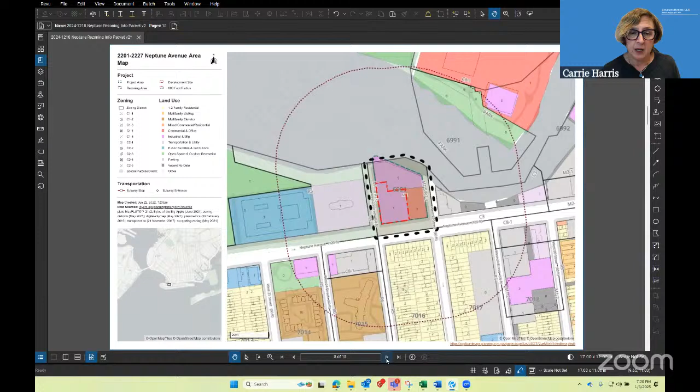There's multifamily in the tan. There's a public garden in purple opposite the site, and a public school in blue, the Mark Twain School. Some of the other uses in the area include manufacturing or heavy commercial uses, such as the building on lot 20.

Our proposal is to rezone the M1-2 block, which is where we are, into a mixed use zoning that will allow the manufacturing use to stay not just as a grandfathered use, but as an active zoning compliant use. It could even enlarge, while at the same time enabling our client's property to be used for a mixed use commercial and residential building, while allowing the Win building to remain as its current use for the shelter.

It's not a shelter that people just come in and out of. Well, they do come in and out, but it's for people who are escaping domestic violence in particular, because that's the Win program.

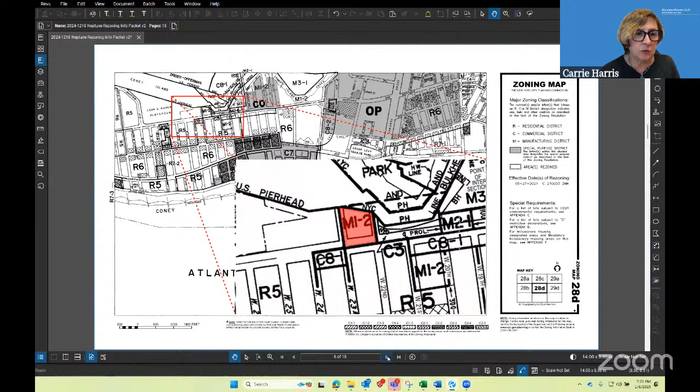So our proposal is to rezone this block to an M1-5/R73 district, which would allow for a maximum of 6 FAR residential, as well as manufacturing use and commercial use. There'll be a text amendment to add a mandatory inclusionary housing district, and there's a waterfront certification. Even though this block is on the creek, there's a waterfront certification, because there is no plan for the redevelopment of Lot 20, the manufacturing district. There'll be no esplanade in the proposal, and no redevelopment of that site at this time.

Nevertheless, which we'll explain more later, the environmental assessment did consider what would happen if that site, Lot 20, were redeveloped. So let's move on.

I'll turn it over to John to describe the neighborhood and the impact of the proposal. Thanks, Carrie. I wanted to just put this rezoning in context.

This is not an isolated rezoning important just for the developer. As you all know, there's a tremendous housing crisis. The governor says so, the mayor says so, the city council says so, and the City of Yes proposals were adopted in response, in particular, to the need for more housing. So this proposal is addressing the possibility of building more housing in the neighborhood, as is needed not only here, but throughout the city. The idea is that there should be a little bit more housing everywhere, and this is a little bit more housing here in the Coney Island neighborhood.

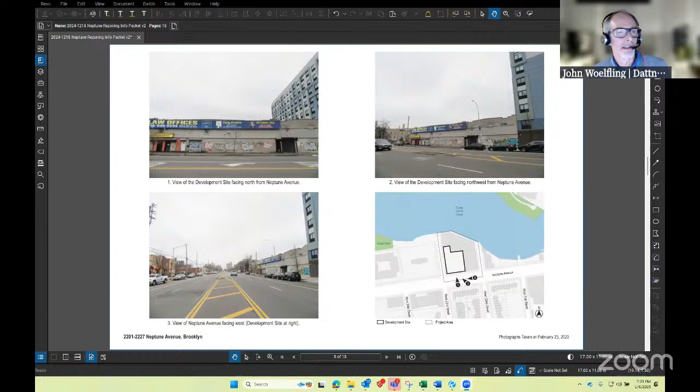Sure. Thanks, Carrie. Yes, the City of Yes is really important background for what we are proposing here. This context is very typical for what's in northern Coney Island along Neptune Avenue. A lot of low scale, but also some larger buildings on the south side, and some middle scale.

You can see the Win shelter here on this side, very colorful, very playful massing, and we pick up on that. I'll show you some of how we're creating a building that is in keeping with that kind of playful nature.

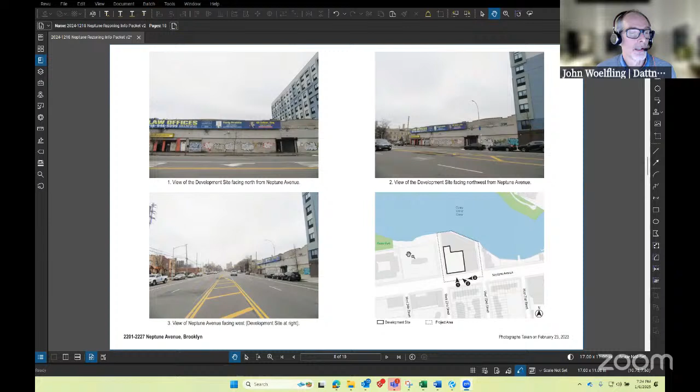Here is the site plan. Just to the north of us is Coney Island Creek. You can see Neptune Avenue is along the south. Carrie described a lot of the context already, but one of the things that I think is really unique about the site is how wide Neptune Avenue is. It is such a wide street. There are many wide streets going east-west in Coney Island, but Neptune is a very wide street.

More images of the same. Here you get to really see that kind of playful height play that happens within the Win shelter.

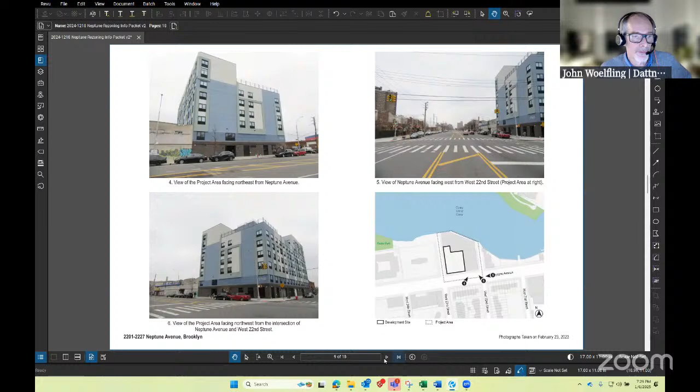At the land use, at the community board meeting a few weeks ago, a gentleman asked about some of the windows in the Win shelter that we're going to be reorienting. So if that comes up again tonight, we do have a reason and a solution for some of the windows on this side of the Win building that will be blocked by the new construction. But basically, those apartments are going to get reoriented and face Neptune Avenue, which is just a very wide street.

The current building, which you see here, is really one-story commercial uses, very industrial in nature, glass shops. There is a bakery here, which is a great neighborhood amenity.

The developers recognize how important that use is. They've been in discussions with the current owners, which is actually a family-owned business, and the next generation of the family really wants to continue operating here. There's been discussions about them coming back in the new building, which will actually be a vastly improved space for them. Right now, they're very susceptible to flooding, like everything that's built at the sidewalk level. So hopefully when they come back, they'll have much improved space.

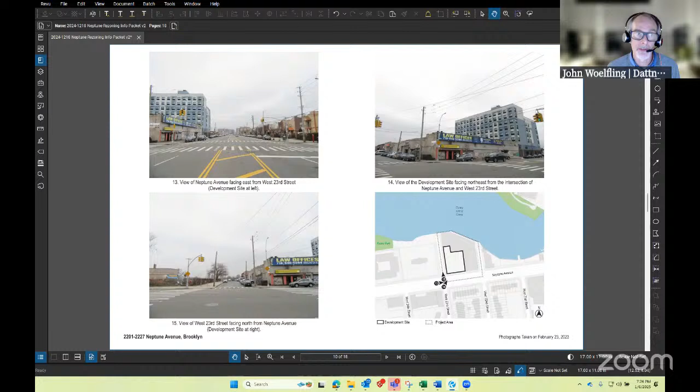Right now, there is no housing at this site. It is manufacturing use, and so there won't be any residents living in this portion of the site that are going to be displaced. The signs are a little junky, and the building's showing its age and its wear. So we have some images of what we're proposing here, which I think are a real improvement.

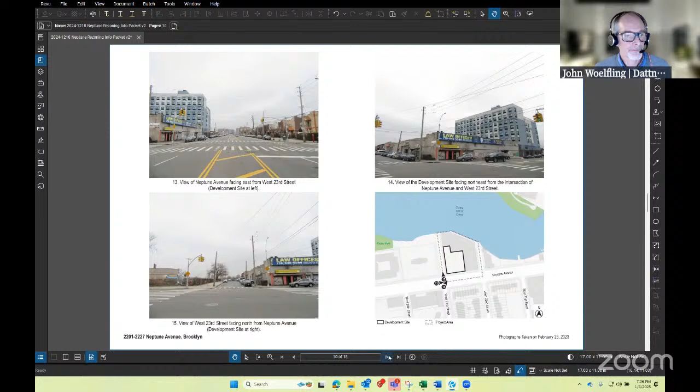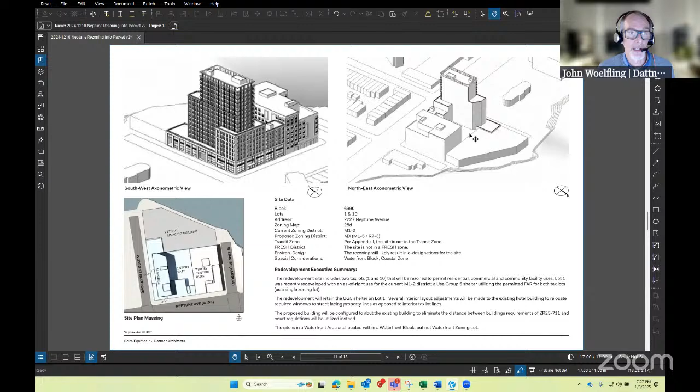Here's some of the zoning data. Here's that lot just to the north that is not part of the project, but it'll be able to stay as it is with the new zoning.

Here is our site plan. Neptune Avenue is to the bottom of the page. It's a very wide street, as I said. West 22nd is here, West 23rd is here, and the community garden is just to the west of us.

Here's the existing Wynn building, and we are proposing an 18-story building at its tallest point, but along the street wall, we are proposing a 6-story and an 8-story mass, which you'll see in the renderings how that height change works with the existing Wynn building.

But as I said before, Neptune Avenue is a very wide street. We think that it can really handle an 18-story building, much like on the south side, there is the Carey Gardens building, which is, I think, 16 or 17 stories. So a very similar size building just across the street.

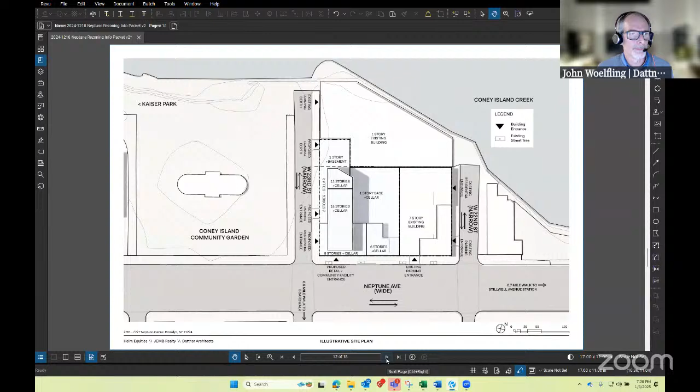So this is what our massing will look like. And you can start to see how that 8-story transitions to 6 stories and then relates to the 7-story and the 6-story of the Wynn building just to the east of us.

Another thing that we've done is we've pushed the darker mass, the brown mass, which is a brown brick, back away from the street wall so that what you see at the ground plane when you're walking along the sidewalk is really this street level use, which is going to be the bakery, potentially other commercial or community facility uses that will really activate that ground floor and that sidewalk level, both with lighting that will be coming from the interior spaces. There'll also be security cameras around the perimeter of the building that will help with security issues.

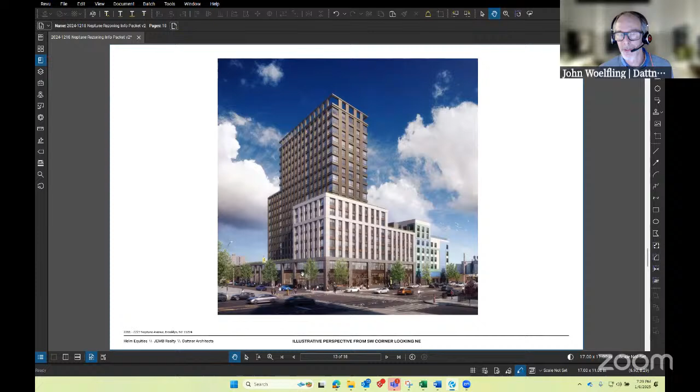And just the active nature of the variety of uses with all the foot traffic, with the residential entrance, which is going to be along 23rd Street, increasing that foot traffic and having more people in the neighborhood is a passive security measure that works, I think, just as effectively as having security cameras and illuminated sidewalks.

So this is what the site currently looks like today. Here's the Carey Gardens building. As I said, a very tall building that's just to the south of Neptune. And our proposal is now overlaid on top of the existing building.

And this ground floor that we're showing here is that really open glazed active use. And the sidewalk level is, as you can see, there may be some sort of cafe that's associated with the bakery, but having that variety of uses at the ground floor is really going to activate the sidewalk.

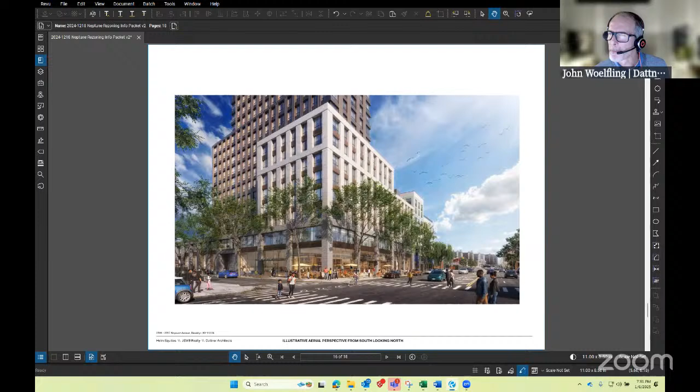So I mentioned the bakery is potentially going to come back. We have a letter of support from them. Neptune Avenue is going to be very activated. And one of the things that we know is a concern here, and it was a concern before the Wynn building was built, was the lack of activity here really kind of allowed for some behavior that's, I don't think we would all want to have in our neighborhoods. And when that Wynn building was built, it started to change that. And this project, I think, will really make that difference even more dramatic with all that street traffic that I mentioned.

In a city planning hearing about this project from a few weeks ago, one of the commissioners asked about flood resiliency. And this building will actually improve the neighborhood's resiliency with regards to stormwater events and extreme events on a more week-to-week, standard basis. Whenever there is rainfall, this building will be designed to meet the current Department of Environmental Protection standards, the agency that maintains all the stormwater infrastructure in the streets.

So they have requirements that during a stormwater event, new buildings like this be designed to retain stormwater within catchment basins on site and then release that water into the DEP infrastructure very slowly, which helps to even out that stormwater flow. Right now, stormwater hits the roof of the building and goes right into that infrastructure, so it can get overwhelmed very easily. This building's stormwater design will help mitigate those issues.

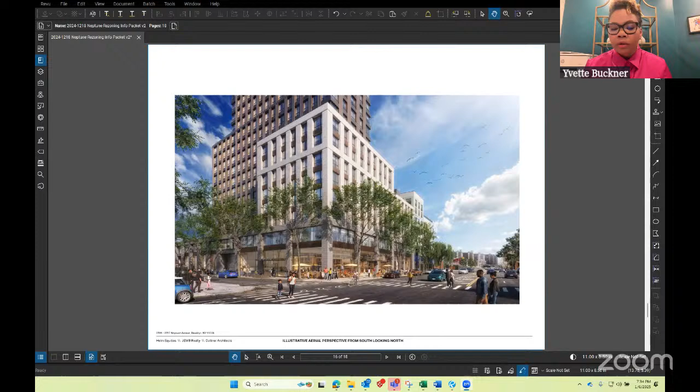Sure, happy to. Good evening, everyone. As they mentioned, my name is Yvette Buckner. I've been working on the government and community relations piece of the project. I know a lot of you were attending the meeting that happened about 2 weeks ago. I wanted to start off quickly and address the issues that were raised.

The issue always is, what's the impact on the community? So just for context, the way we were looking at doing this project is that we wanted to go not just far and wide in the community, but also deep. The reason we were able to go far and wide and talk to folks at NYCHA and at Coney Island Alliance is because the direct impact of the environmental study, or the shadows on buildings, was not completed yet when we had spoken to them, and that did not impact them the way it does the homeowners right across the street. So when we wanted to meet with the homeowners, we wanted to have all the answers to the questions. We wanted to go deep and be very sincere, genuine, and factual about what was coming to their block, their neighborhood, directly impacting them.

So we heard the concerns loud and clear. The very next day, I had a street team go up and down between West 18th and West 33rd. They gave out flyers, we talked to folks, and put information in everyone's mailbox. We had a community breakfast that happened on Friday. We did 3 rounds of going up and down Neptune Avenue between 18th and 33rd on 3 different occasions, all throughout the holidays. We got to meet and talk with a lot of great neighbors and residents, hear the concerns, hear their ideas, hear what they wanted to bring to the community, and hear how they felt about the size of the project. We had a community breakfast this past Friday, January 3rd.

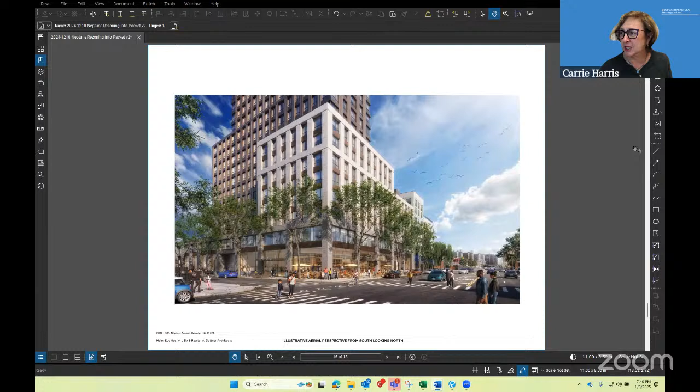But the highest for a studio would be at $80,000 of income, 80% of AMI, and up to $103,000 for a 2-bedroom apartment at 80% of AMI. At 40% of AMI, a 2-bedroom apartment is $52,000 of income. If you have specific questions about in between, just ask and I'll let you know.

In terms of jobs, that was another important question. We estimate 45 jobs in the building right now, and what's estimated based on the environmental assessment is going to be 75 jobs, so there's a net increase in jobs. Those would be both in the businesses located in the building, as well as jobs associated with the residential building. So again, an expected increase in the number of jobs that would be generated by this building.

The developer has spoken with the businesses that are in the building. He had not spoken to them at the time of the last meeting, but all of them have been contacted and they're aware of the rezoning. None of them will have to leave before construction commences and demolition has to happen. The applicant is speaking with them about who might want to stay in the building, return to the building in the future, in addition to the bakery returning.

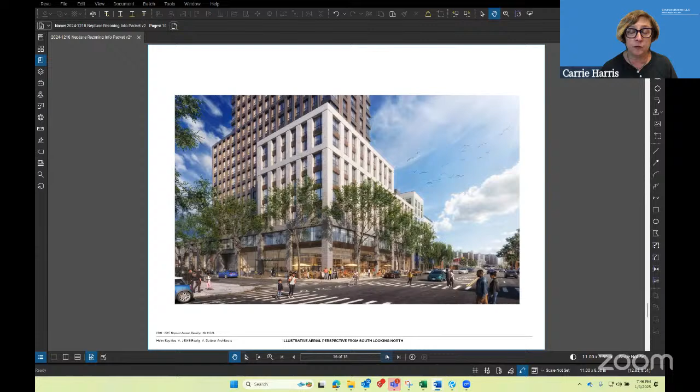So with that, if you have any questions about the timeline, thank you, John.

Just so you know what's coming forward, we are in the ULURP process right now, where we've had the December 17th community board hearing. We're having this land use committee meeting, and there'll be a full board meeting on January 22nd. I believe the land use committee will take a vote tonight with a recommendation. We hope your recommendation is to approve the project. And then the full board would vote on that recommendation on the 22nd, and that would become the community board's recommendation to city planning as to how to vote on this project.

Borough President Reynoso will be considering this project after the community board does. The borough president has until the end of February to make a recommendation to the City Planning Commission. The City Planning Commission has a formal vote by the end of April. That vote is a binding vote. And the City Council would have then until mid-June to vote.

Once the project is approved by the City Council, the developer will be in earnest moving towards design, development, and submission of plans to DOB and to Department of Environmental Protection and for utilities. That'll take about 12 months. And then the construction itself will take about 2 years to 2.5 years to complete. So that's the overview, and we would welcome any questions that you may have.

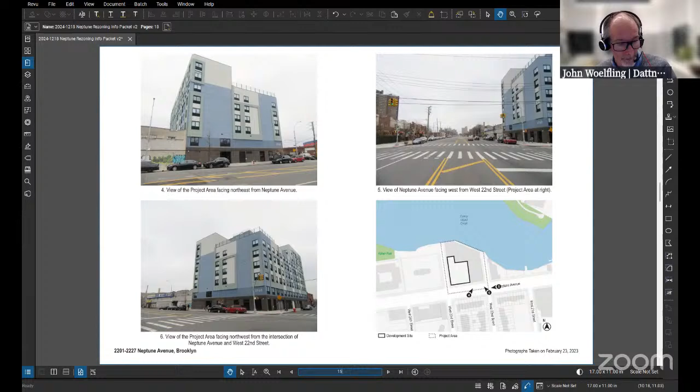Can you see the screen now? Yes, okay great. So I'm going to show you a photo of the Neptune frontage of the WIN shelter. There are 3 apartments, 3 units, 3 lines of apartments on the west facade that if we don't do something, those windows will be blocked. But we are going to do something - we're going to reorient those units so that their windows are on Neptune Avenue.

So we're going to take those units and rotate them 90 degrees so that their light and air comes from Neptune, and not the places where the two buildings are going to abut together. So that's our solution for that.

And John, isn't there also—you've made the building next door lower, so two floors are clear. And is there a courtyard behind that?

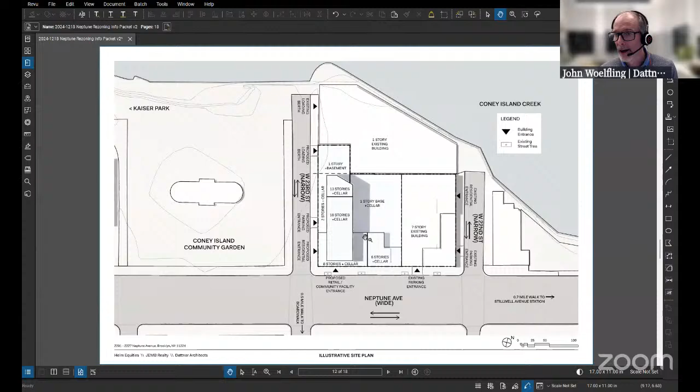Yeah, so that's probably best illustrated here. This is the current women's and children's shelter, and there's a one-story base at the bottom of the new project that will allow those windows along this face to look out onto that open space. So all the rest of those windows that face west are going to have their light and air preserved as well.

So basically, you're blocking the windows on the side, so they'll be using the three windows in front. Basically, we're going to create new windows on the front. We're going to reorient those units so that they face south.

Oh, okay, but it's only for the row of apartments—the column of apartments, if you will—that are, what, the first or the first and second window, John? It's these three windows, so we're going to reorient all three of these. No, but on the side, which windows on the side? Yeah, so this one, two, and three that are here, those are all going to be—and this is kind of a composite image. What's probably best is to go back.

So these windows that are here, these three windows, are going to get rotated so that they're on this face. So you see, they're going to get more windows on Neptune. Right now, they only have one window each facing Neptune, and in the future they're going to have three windows facing Neptune—one, two, three. So instead of a blue wall, there'll be more windows.

Correct. And then the apartments with windows further away from Neptune won't be blocked, because there'll be a courtyard you can't see from Neptune, but it'll be back there. So those windows won't be blocked. Correct, it's a very thoughtful...

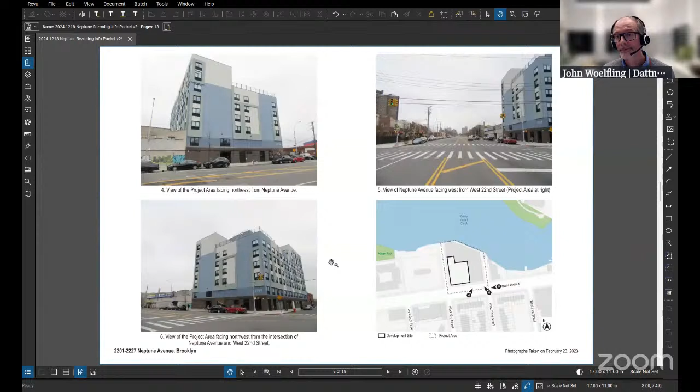...reorientation of those apartments that have only one row—one column of windows—now, but are going to have three windows in the future, facing Neptune. You follow what I'm saying? Yes, thank you.

Great, next. I also wanted to mention that we've talked about the traffic, and I understand summer is a busier time here than in other neighborhoods, where summer may be slower. And Steve, I think, is still looking up the traffic information. I wanted to reiterate the environmental impact statement.

It requires an E designation—that means an environmental designation. So all of the questions and concerns about hazardous material in the building, and that might even be on lot 20 right next to the creek, those have to be addressed during demolition, excavation, and development of the project. That's the law.

Thank you, who was the next on the questions? I think Lucy. Oh, Lucy, let Lucy go. Oh hi, how are you? Let's take down the presentation. Sure, again, yep.

I was the one that questioned the homeowners across the street, so if anyone is here from that location, I would like to hear from them. That's the first thing. I also want to say that I'm a little disappointed that you guys did not present all the paperwork to the community board prior to coming.